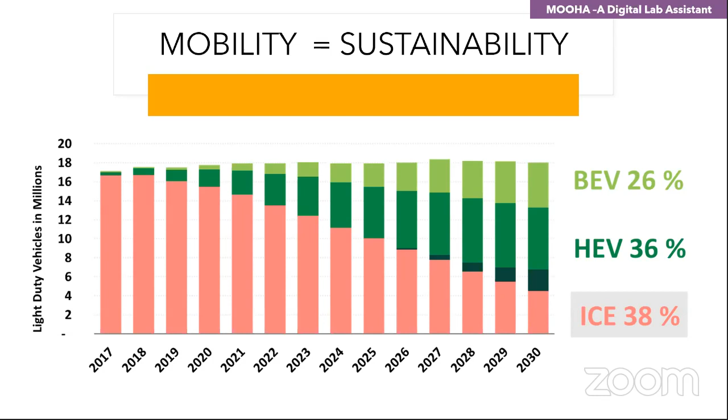ICE is internal combustion engines, HEV is hybrid electric vehicles, BEV is battery electric vehicles. As you see here, by 2030 you will be seeing a significant portion of our road transportation driven by hybrid and battery power. So what this means to the lubricant industry, what this means to the bearing industry, is a big question.

So if you look at the lubricant industry, this is the bar graph, this is a survey done by McKinsey. The volume of lubricants would increase to 2030, and that's basically what we call a threshold. At that point, there is significant adoption of alternatives to the internal combustion engine, and the volume of lubricants used goes down, from 16.9 to 15.9.

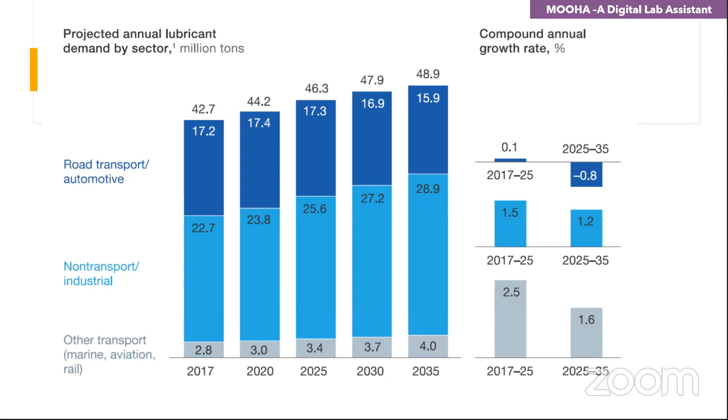The same thing happens, or similar things happen, in the bearing industry as well, where the number of bearings required in the powertrain would go down when you switch from internal combustion engine to electrical vehicle engine. There is a lot of technology and policy aspects to this transformation from transportation to mobility. To discuss these technology and policy aspects in this transition, we have two keynote speakers on this platform. One is Dr.

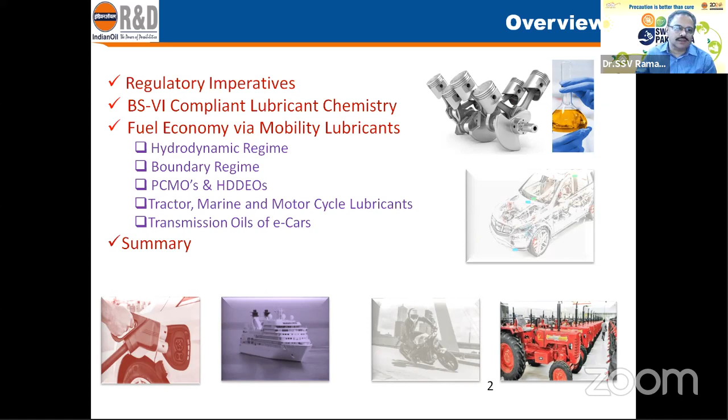Moving on with my presentation, first let us see what kind of regulatory imperatives we are talking about when we discuss the mobility segment. Most of the mobility segment all over the world, not only in India, is governed by three major imperatives: improvement of air quality - most emission legislations ultimately aim at air quality improvement; climate change, due to greenhouse gas emissions; and zero emission travel. When more and more urbanization occurs, mobility becomes more pronounced for urbanized civilizations - by the way, I liked your definition of the difference between transportation and mobility.

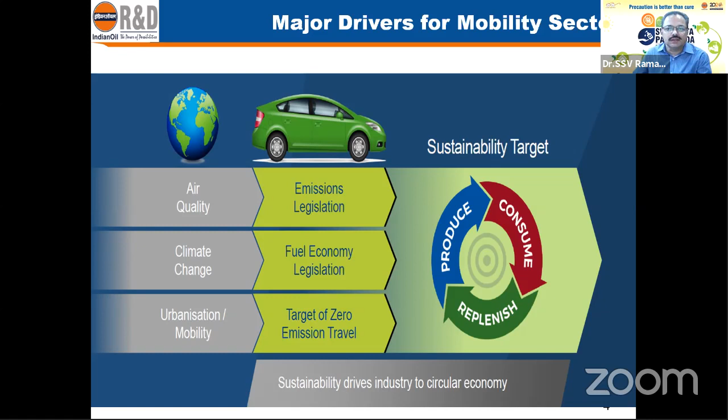Targeting and achieving zero emission travel is one of the key drivers in sustainability operations. That automatically brings the spotlight on fuel economy.

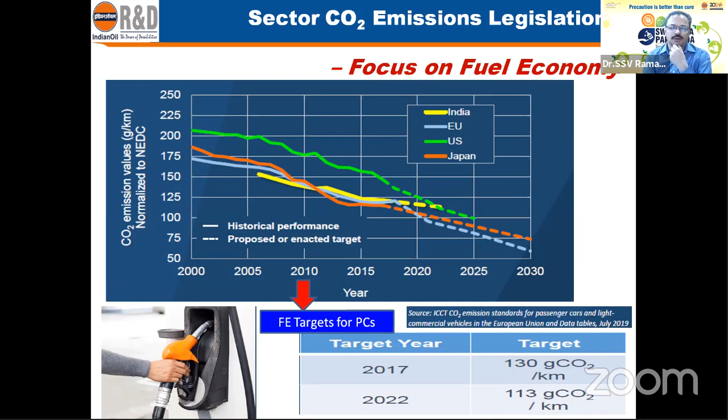And if you see the fuel economy imperatives, each geography has its own set of compliances. I would be sticking to my own geography, Indian geography. In 2017, our target for fuel economy in terms of grams of carbon dioxide per kilometer was 130. But going forward by 2022, we have tightened this target as a nation, and we are set to achieve 113 grams carbon dioxide per kilometer. On the emission regulation front, BS means Bharat Stage 6, which is almost equivalent to Euro 6.

What kind of impacts are we talking about? By the way, we just graduated from Euro 4 kind of emission regulations to Euro 6 kind of emission regulations in Bharat Stage 6.

In April 2020, our fuel quality and emission regulations on a pan-India basis became conforming to Bharat Stage 6 norms. So what does this translate to in terms of key emission ingredients? The toughest ones concerned with climate and ambient air quality are oxides of nitrogen, NOx, and particulate matter.

Let's see how these ingredients and their compliance vary when moving from BS4 to BS6. For example, in two-wheelers, the oxides of nitrogen are reduced by 75% compared to BS4 levels, and particulate matter regulations are introduced for the first time for two-wheelers.

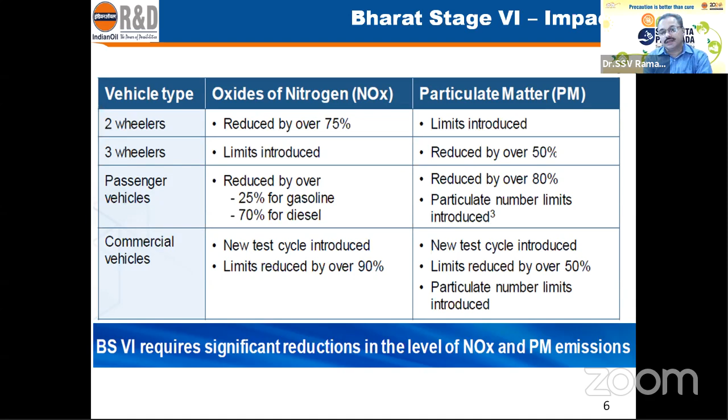Similarly, the automobile industry has pumped in so much money, both industries put together. Now, any new vehicle coming on roads post 1st April 2020 meets Bharat Stage 6 emission norms. So what is beyond?

Globally, people are talking about onboard diagnostics, further tightening of NOx and particulate matter beyond BS6 into 2021, 2022 and 2023. There would be further tightening where second stage onboard diagnostics can be introduced beyond 2024.

In terms of fuel economy legislations, there will be an 8 to 13% fuel economy improvement compared to what exists today. The fuel economy CAFE-like norms were introduced in India in 2017. From whatever we have today, there will be an improvement of 13%.

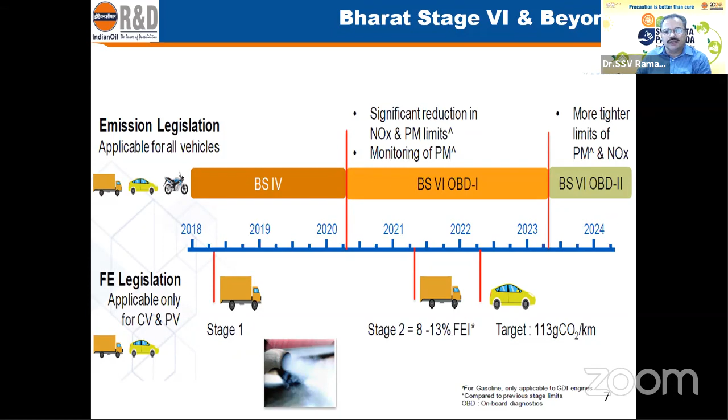As mentioned in the previous slide, carbon dioxide emissions will be reduced from 130 to 113 grams CO2 per kilometer. So there are a lot of technological changes across the vehicular segment, whether two-wheelers, three-wheelers, passenger cars, or heavy duty diesel segments and transmissions—you name it, there's a lot of technological intervention.

A lot of after-treatment devices have come in, whether diesel particulate filter, diesel oxidation catalyst, or selective catalytic reduction—a very prominent after-treatment device especially for the commercial heavy duty segment. Lean NOx traps are also used.

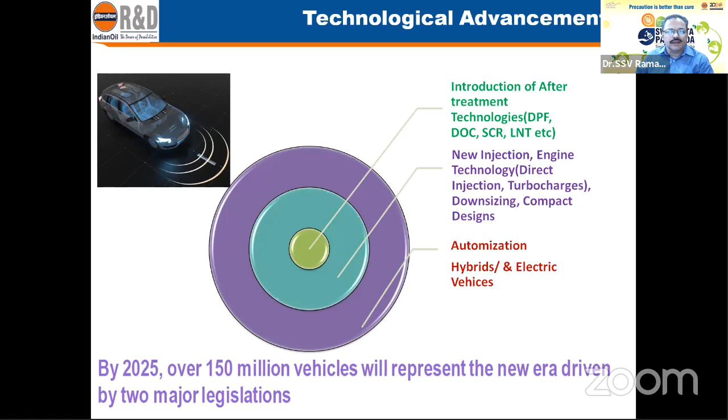These are for passenger cars to meet BS6 compliance. New injection systems, direct injection, turbocharging, downsizing, improved automation, hybrids, electric vehicles—as shown in the introductory slide, there can be several degrees of hybridization happening in the mobility segment. These are all going to pose a lot of challenges for the lubricant to cope with, to be compatible with, and to meet the performance standards laid down by these technological challenges.

So let's talk about the generic change in lubricant chemistry. Whatever the chemistry or type of lubricant, the chemistry has undergone change. Whatever chemistries we have been using, now with after-treatment devices, the compatibility of a lubricant with the after-treatment device is the sole theme of lubricant reformulation as we graduate to the BS6 regime.

And with that came the new concept of low SAPS engine lubricants. SAPS stands for sulfated ash, phosphorus, and sulfur. This diagram shows the deleterious effects that each one—sulfated ash, phosphorus, and sulfur—can cause to various after-treatment devices, and what kind of negative impairment excessive phosphorus can give, and so is the case with sulfur.

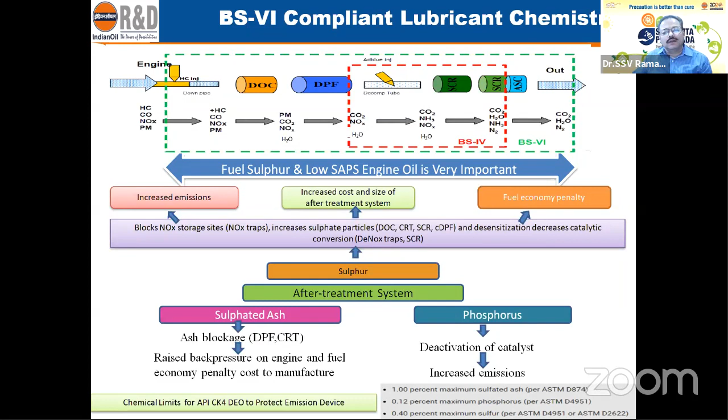So all these parameters have been regulated, and new chemistries have been inducted into the lubricant additive arena, so that these after-treatment devices can function properly, optimally, and to their full efficiency, so that emission reduction is sustainable and durable throughout the life of the vehicle.

Now coming to fuel economy via mobility lubricants, this is the main focus of my talk. For all the clamor about fuel economy, how much fuel economy can we really attempt? If you see...

the energy cycle or combustion cycle of an internal combustion engine, the fuel which is combusted generates energy, but majority of it is lost in exhaust and air. Mechanical losses account for 16%, drivetrain accounts for 10%, and finally the energy that propels the wheels is 12%.

So with the right kind of lubricant, we can aim at minimizing these mechanical losses of 16%, and frictional losses specifically are around 5 to 8%. Our sole focus is on how we can minimize this friction and add to the overall fuel economy equation of the vehicle, whether by engineering intervention or lubricant intervention.

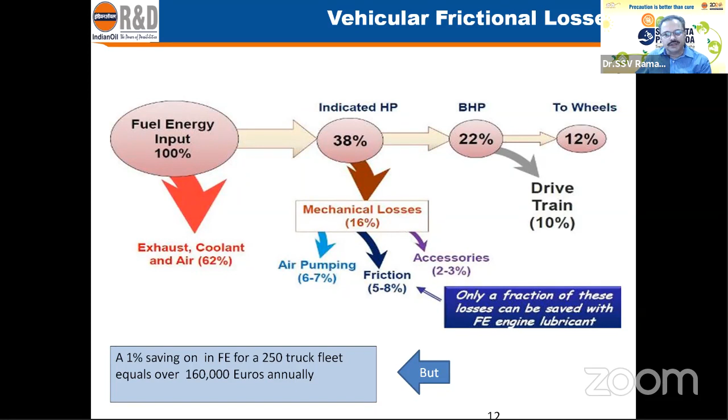But when we talk about these interventions, lubricant intervention is a much cheaper option to garner a significant amount of fuel economy for the vehicle compared to engineering interventions. This graph clearly depicts percentage fuel consumption reduction per investment of US dollar. You see engine friction reduction, cam phasing, cylinder deactivation, gasoline direct injection - these are known engineering interventions to get fuel economy. They are all extremely costly, and the overall benefit they offer is much, much less.

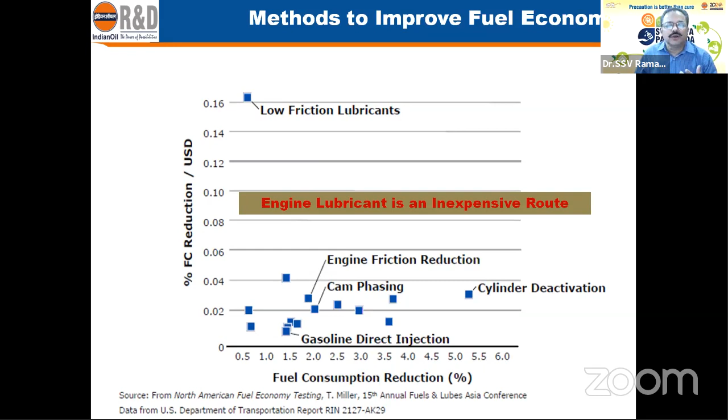But with much cheaper cost, low friction lubricants can offer you substantial fuel economy. So it's all the more imperative for all of us lubrication engineers, chemists and formulators to focus on how we can optimize the lubricant for fuel economy.

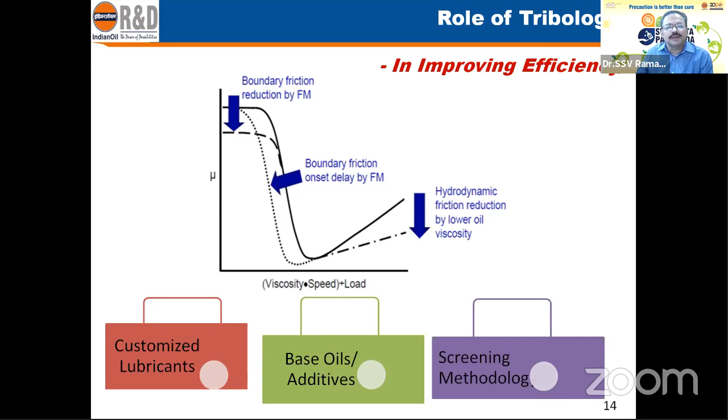So here comes the role of tribology in optimizing a lubricant for improving efficiency - the famous Stribeck curve, with three lubrication regimes: boundary lubrication, mixed or EHD lubrication, and hydrodynamic lubrication. In each of these regimes, lubricant can play a role through customized base oils and additives, with a separate screening methodology acting as an optimization tool for achieving fuel economy in each regime. I would illustrate with examples how tribology plays a key role in optimizing the fuel economy credentials of a given lubricant.

But lubricant also has its own limitations. If you compare the maximum fuel economy impact, driveline lubricants and engine lubricants put together can offer you in all 4% of fuel economy. This was some Cummins pronouncement way back in 2007.

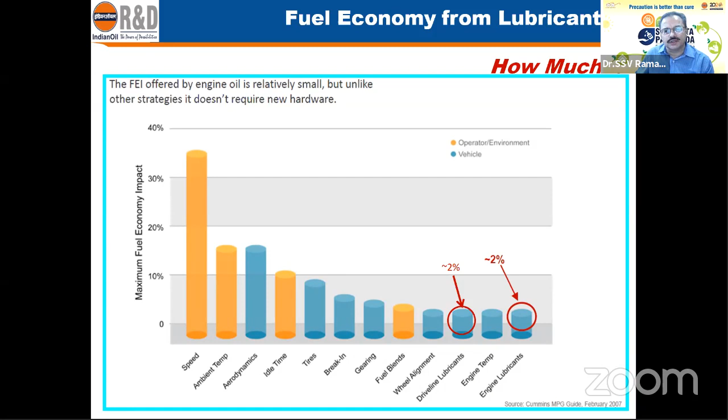At extremely high temperatures, fluids tend to thin down, so maintaining some optimal higher viscosity is needed. At extremely low temperatures, like -20, -30, -40, the monogrades tend to solidify or freeze, so maintaining some lower viscosity is the name of the game, and multigrading offers that. Viscosity index improvers, various kinds of polymeric substances, actually enable the lubricant to achieve this diverging and conflicting behavior - a non-Newtonian characteristic to the fluid.

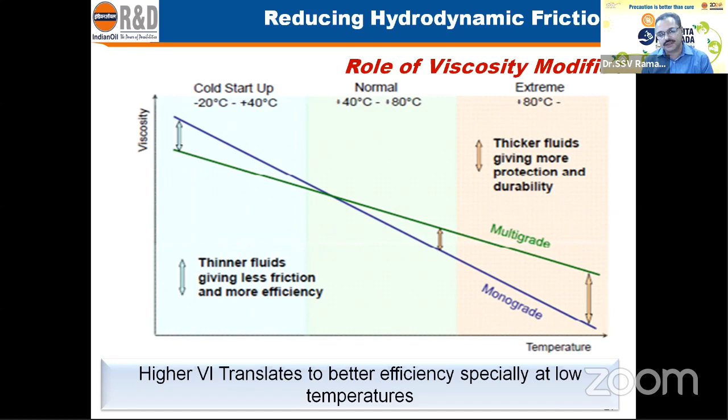Thinner the fluid, it gives less friction and more efficiency. Thicker the fluid, it gives more protection and durability, but fuel economy would be the casualty. So the whole game is how optimally you can balance these two conflicting situations - you need thicker fluids for durability, and thinner fluids for fuel efficiency. So how do we manage this challenge?

Getting some deep dive into the tribology, hydrodynamic friction and the hydrodynamic lubricants for hydrodynamic friction can be very well optimized by tribological instruments like mini traction machines, by following the traction coefficient. It's ball on disc, where you can simulate many sliding conditions that exist in many parts of the engine or transmission.

Clearly, group 3 and PAO4 are distinctly discriminated compared to group 1 and group 2. Group 1 and group 2 are mineral oils with dissimilar composition. They have bigger molecules, smaller molecules, and relatively more disorderliness. That's the reason why the traction coefficient is higher in group 1 and group 2 base oils.

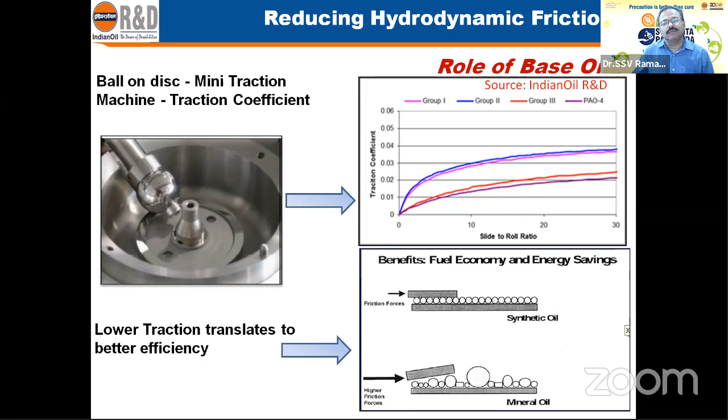So these kind of screenings are extremely important for us to select the right kind of base stock for a given application and for a given type of lubricant formulation. These kind of tribology screenings will come very handy for lubricant formulators who are developing products.

One more time-tested parameter is high temperature, high shear viscosity in predicting and optimizing the fuel economy credentials of a given lubricant, whether it is a passenger car lubricant or a heavy-duty diesel engine lubricant.

You see, this is a graph, a very popular graph from Lubrizol, thanks to Lubrizol. They have plotted the fuel economy versus high temperature, high shear viscosity. When I say high temperature, high shear, the temperature is 150 degrees centigrade. This is an ASTM standard test, and the shear rates are 10 raised to the power 6 per second, or inverse second.

As you go down the viscosity grades, from higher viscosity grades to lower viscosity grades, and as the high temperature, high shear viscosity also goes down, then the fuel economy will go up, from 1% to 4%.

This has been validated by the M111 FE European fuel economy test. This is also a very popular Mercedes-Benz engine test, and that clearly establishes the relation between high temperature, high shear viscosity and the fuel economy.

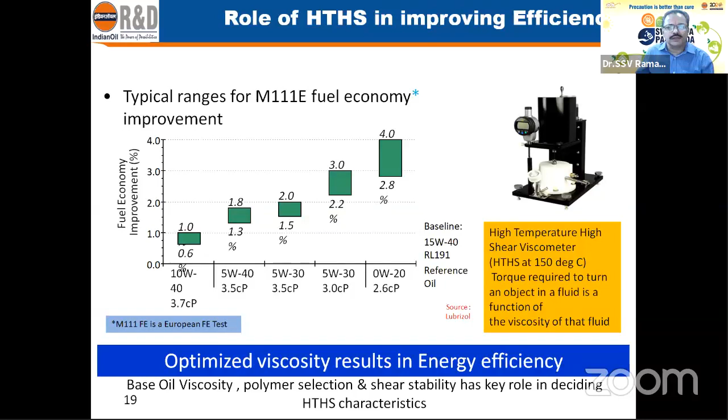In fact, when we talk about low viscosity and higher fuel efficiency, the Japanese are the front runners. We must give credit to them, as they are the ones who actually pushed the famous SAE J300 viscosity classification to introduce lower viscosity grades, which were unthinkable just a decade back. These are interventions only 5 to 6 years old.

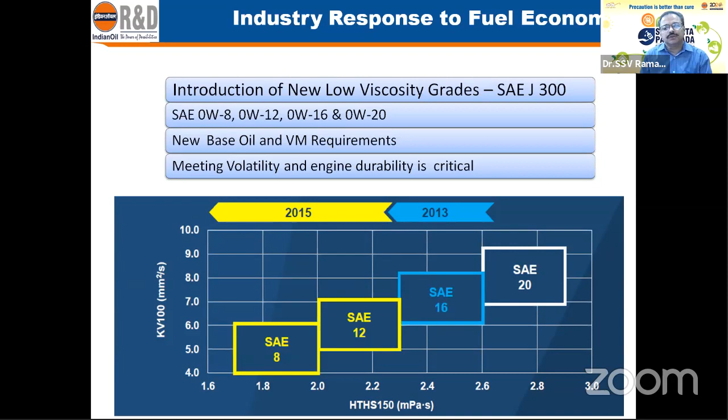These new grades, like SAE 12 and SAE 8, are the new low viscosity grades which can offer maximum fuel efficiency to passenger car lubricants. Slowly, not to that extent, these are popular in the heavy duty diesel segment too, but that segment is also now slowly getting acclimatized and accustomed to reducing the viscosity of their engine lubricants.

Coming now to this - so this is all about the hydrodynamic regime, but when you come to the boundary regime, how can fuel economy be achieved or derived in a boundary regime, when a lubricant moves to a boundary regime?

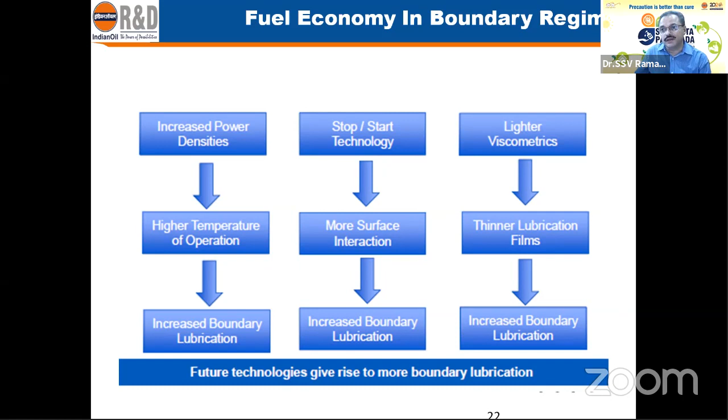Boundary regimes are characterized by high power densities, high temperature operations, and stop and go operations, and very light viscometrics. The lighter viscometrics, because the film thickness becomes very, very small, very thin, means there might be increased boundary lubrication. So here again is a Stribeck curve.

We keep getting this curve. When we are talking about lubrication, we can't do away with this - it has almost become indispensable. So in the boundary lubrication regime, the friction coefficient,

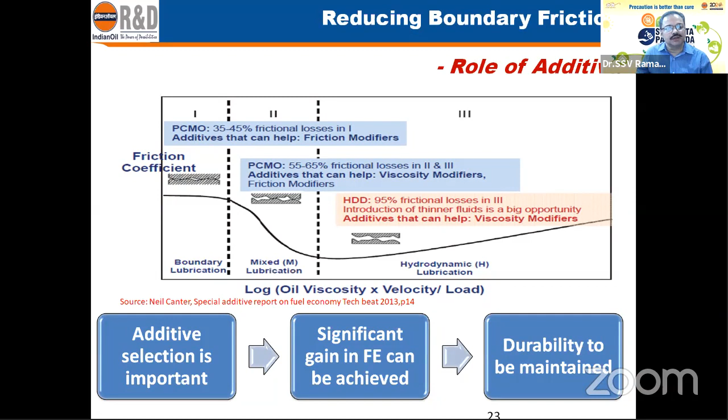additive selection and additive chemistry are becoming very, very important. But as you move to the hydrodynamic regime, as we talked about in the previous section, the viscosity plays a greater role. But the majority of vehicles, majority of lubricants, operate in the intermediary section, the mixed lubrication regime. So here, your viscosity as well as your additive chemistry become equally important.

So I just want to introduce another tribological screening tool, the SRV machine, especially SRV.

SRV is an oscillating test, roller and flat disc, and you can really incorporate any kind of material simulating the actual engine metallurgy. You can operate through various speeds and loads, and you can measure the friction coefficient.

Here is again a very illustrative example of how a friction modifier as an additive can bring about a very distinctive difference in terms of friction coefficient, thereby improving the fuel economy.

See a host of oils that we tested in a particular set of conditions in SRV. The one which is inhibited with the right kind of friction modifier, with right chemistry as well as right concentration or dosage of the friction modifier, see how distinctly the friction coefficient is lesser compared to the rest. This is the kind of distinction that formulators are looking for, and that's how the friction modifiers are selected and incorporated into various formulations.

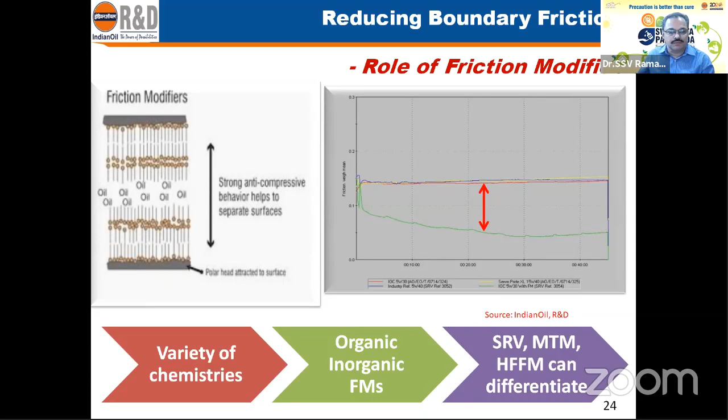That's the boundary regime. Then some more direct examples of passenger car motor oils and heavy duty diesel engine oils which were made fuel efficient. How did we make them fuel efficient? What kind of screening have we done in formulating and launching them in the market?

I'll first talk about passenger car motor oil fuel economy. We have again taken resort to MTM traction coefficient studies. Also, we have a friction torque test which is conducted on an actual engine.

Both these tribological screenings can be validated by the actual fuel economy measurement in a vehicle on a chassis dynamometer. We invariably use in India the modified Indian driving cycle, because that is more akin to our driving conditions than world harmonized testing cycles or any other cycles.

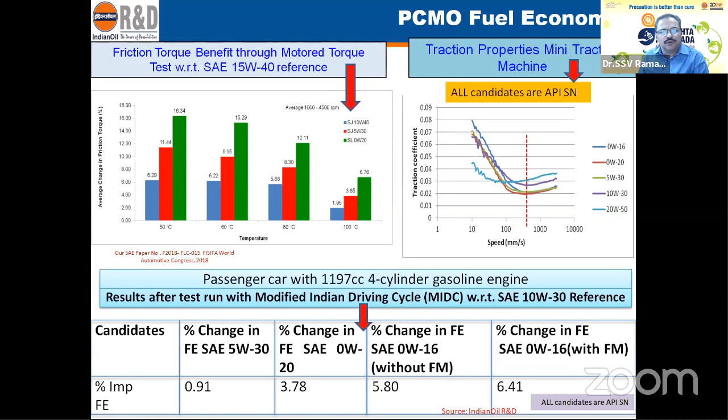So the good oils from the screening of this friction torque test as well as the MTM screening of traction coefficients are all validated by chassis dynamometer testing, wherein as you go down the viscosity, viscometric scale, the fuel economy has been actually improved, and you can get as high as 6.41% in the set of conditions that we have tested in a gasoline engine, in a four cylinder gasoline passenger car.

Coming to the heavy duty diesel engine, till very recently, I think till 2010, fuel economy via diesel engine lubricants was not a very accepted concept. The idea was that only passenger car engine lubricants can give fuel economy, that diesel engines are otherwise very fuel efficient, and a lubricant cannot make much of a difference on account of fuel efficiency in a diesel engine. This used to be the concept, but

we have proved wrong. Many people in the world and many lubricant formulators have proved that wrong. Also, there was an anathema in the heavy duty diesel segment to go down the viscosity line from 15W40. SAE 15W40 was gospel viscometrics, and going below it would be almost perceived as detrimental for the durability of the engine.

So we attempted, for the first time at least in our country, to go for 10W30s. Today, of course, 10W30 is a very popular grade in heavy duty diesel engine lubricants also. But when we did it in 2010, we had to face a lot of resistance from engine manufacturers and the users as well. So the sole apprehension was that when you reduce the viscosity from 15W40 to 10W30, the durability would be at stake.

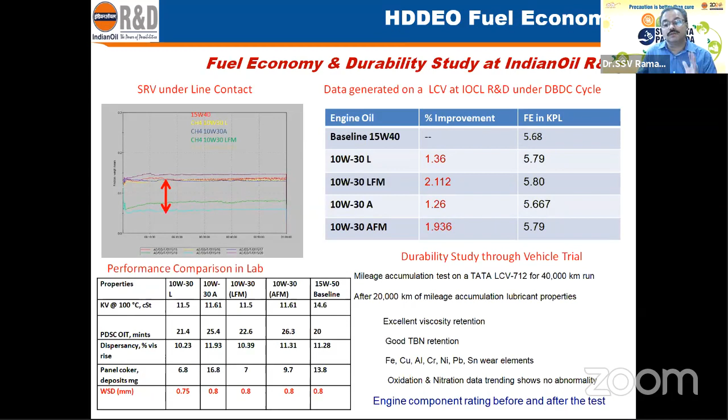And we could validate this not only in chassis dynamometer but also in actual field trials. That's how the concept of a green combination, a fuel economy combination of engine oil, transmission oil, and axle oil, has come to the fore.

Our company in India was one of the first to introduce this green combo of three fuel efficient lubricants. Our claim was that if you change this set of three lubricants in a heavy duty diesel engine truck, you can garner a fuel efficiency as high as 4%. And we have proven it and validated it in the actual field.

So what all we did is, we have reduced the viscometrics in the engine oil case from 15W40 to 10W30. In axle oil, the traditional viscometrics is 85W140, and from there we have reduced it to 80W110. And in transmission oil, the conventional 80W90 was replaced by a lower viscometrics 75W80.

While doing so, we were very conscious about the few percentage points of fuel economy that we might get extra. We were extremely conscious about durability, and we have augmented the anti-wear chemistry of the lubricant formulations of all these categories of lubricants.

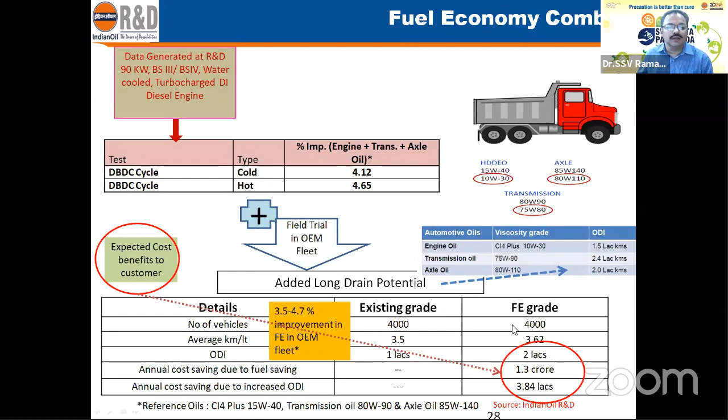So what kind of monetary advantage? These numbers look very small when you talk about fuel economy, but on an annual basis, the fuel saving benefits run into millions of rupees. Even the drain periods can be introduced or extended, and there also you can realize benefits.

So tractor lubrication is another segment. In fact, India is the largest producer of tractors. In tractor lubricants, besides engine and axle, there is a wet brake lubricant, which is a key lubricant employed in many oil immersed brake system containing tractors. And chatter is a big, perennial problem in these tractors.

A lot of theories are there - static friction, dynamic friction. You optimize one, the other will go off, and there appears a chatter. Chatter is a big irritant for the user, so they hold the lubricant solely responsible for the chatter. So the best and optimal condition is you should have low static friction, and at the same time, at the right kind of time, you should have high dynamic friction so that the chatter would not be there.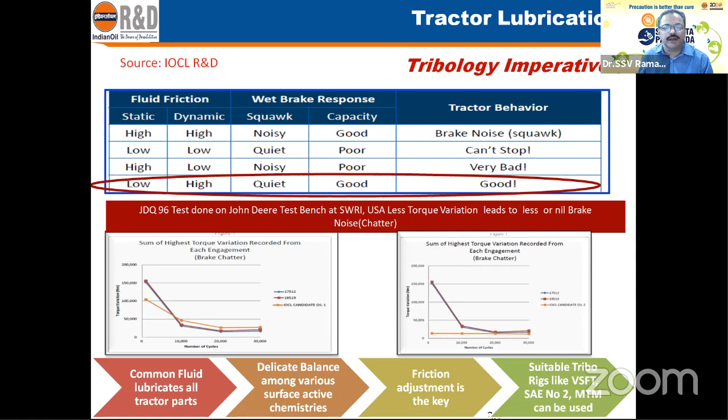And we were able to screen properly in a John Deere screening test at SWRI, and we could get an absolutely noiseless lubricant.

I would only take one more example - this is an example close to my heart. Marine lubricant formulation is a different ball game. Unlike the case of passenger car motors and heavy duty diesel segment, where there are standard engine tests where you can optimize the lubricant formulation before it is put in the actual engine or in the field, for a marine lubricant there is no standard engine test, no universal specification, unlike the case of PCMOs and HDDOs.

So you have to totally rely on your gut feeling, or you have to rely on tribology. So we relied on tribology, and we have a high frequency friction machine, which is actually a reciprocating machine, where film thickness is measured when contact potential is observed, and you see a good oil and a bad oil. The lubricant film between piston and cylinder liner, especially in huge marine two-stroke engines, cylinder liner wear is the key performance attribute expected out of marine lubricant. And to optimize that, there is no other engine test, no other means.

So we devised this tribological screening, and see this - in a bad oil, you see these valleys in the graph, which clearly indicates that the film is forming between piston and liner, but it is getting broken. Such an uneven film will lead to catastrophic cylinder liner wear.

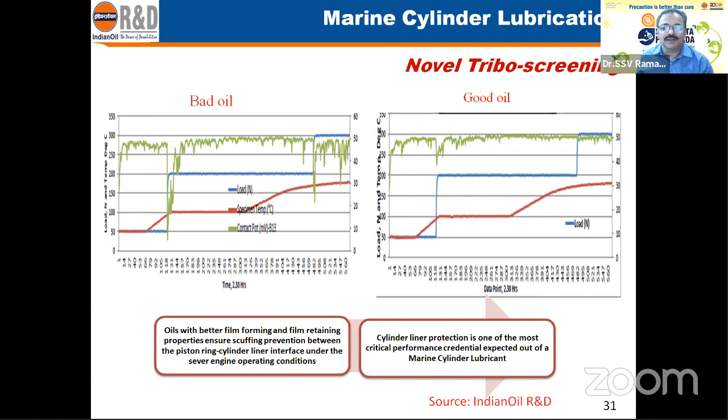We were able to very accurately predict this by tribo screening. Believe me, based on this, I have run two marine shipboard trials, paying huge money in terms of insurance premium. Ultimately, we could get the approvals of the original equipment manufacturers. That is the beauty of this tribo screening.

So I'll skip the motorcycles, and I would only move to this, my penultimate slide.

So much of talk about e-mobility and e-cars, and transmission oils. Ordinary transmission oils need to be reformulated, and noise performance is to be taken into consideration for the transmission oils which go into these electric cars. And it's a big challenge.

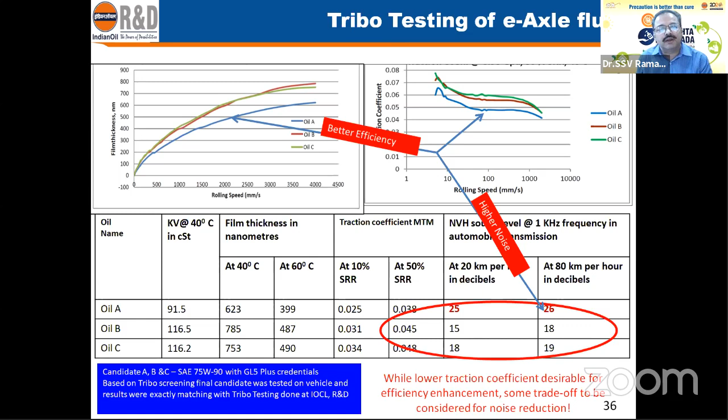Like you see the film thickness of this blue line, this is oil A, and the film thickness is lower, so viscous drag is lower, and so the traction coefficient is also lower. But I thought, I'm rejoiced, okay, the traction coefficient is less, so this should be very good. But see the noise readings - this is one of the worst oils as far as noise is concerned.

So there should be a trade-off between the noise performance and efficiency and film thickness. So I think it's a great challenge, and tribology again can come handy in negotiating those tough challenges.

So to conclude, tribology plays a key role in developing customized lubricants. Friction reduction is the key for improving efficiency. Low viscosity oils need to be balanced for better wear protection and durability besides fuel efficiency. Tractor, marine, and motorcycle lubricants need to be optimized using sound tribology fundamentals. Transmission oils for electric cars also require noise-related tribology screening.

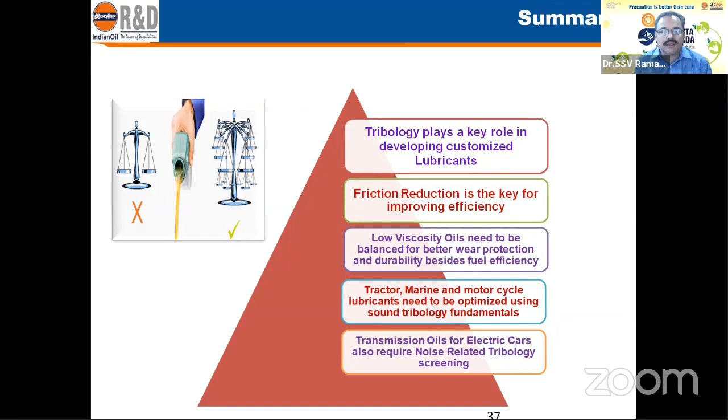Thank you, Dr. Ramakumar. Fascinating description of various elements involved in transportation. And it was very nice, the last slide, where you described the noise and vibration effect and the challenges in it. That becomes basically a preface.

It's a preface for Sergio to take it up from here, I guess. Noise, vibration, and harshness have become the driving factors for bearings in electric vehicles. So the platform is yours, Sergio. Please go ahead.

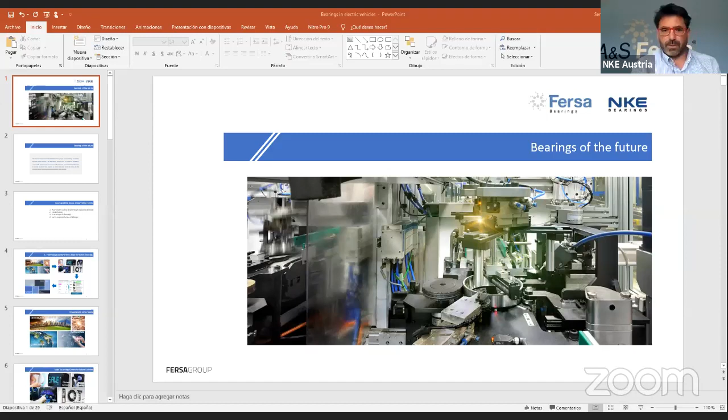Okay, so can you see all the screen? It's perfect, Sergio. If you can make it full screen, then it's just now. Yes, perfect. Go ahead, come in.

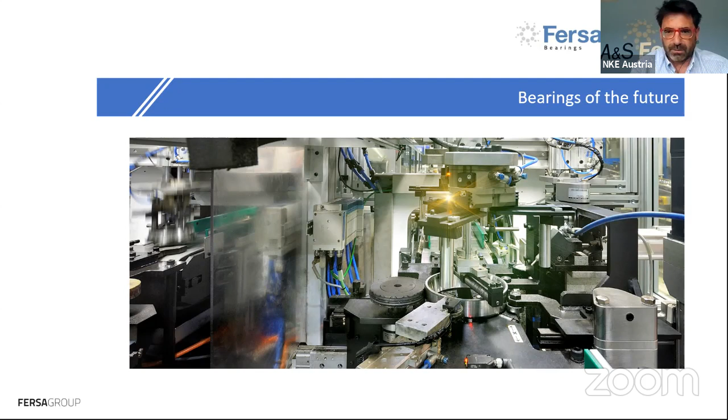Basically, I want to tackle 4 main chapters or topics. First one is how society shapes tomorrow's components or tomorrow's bearings. Some of my insights were also discussed before by Dr. Deepak and Dr. Ramakumar. What that means for electrification - I will try to provide some pictures of the different electrical vehicles or electrical models, either hybrid or battery, and so on.

Third is when we see the future versus electrification, it seems that the future is really black. But I think there's a new hope for bearings. I will dive into this topic and provide some insights that bearing makers - not only us but also other bearing makers - are looking at as a kind of challenge for us. And finally, what is the response of the company we are representing today to these new challenges?

This is a summary of how society drivers shape tomorrow - not only bearings, but also mechanical components, but let's talk about bearings. Some of them were already mentioned before. So as society, we have some social trends you see here on the top left corner. Those trends move to address some technological drivers. If we move to electrical mobility that you mentioned, Deepak, mobility has a very nice definition with flexibility and sustainability. So we have some challenges on electrical mobility, and those challenges also going down when it comes to bearings put in front of us some other challenges.

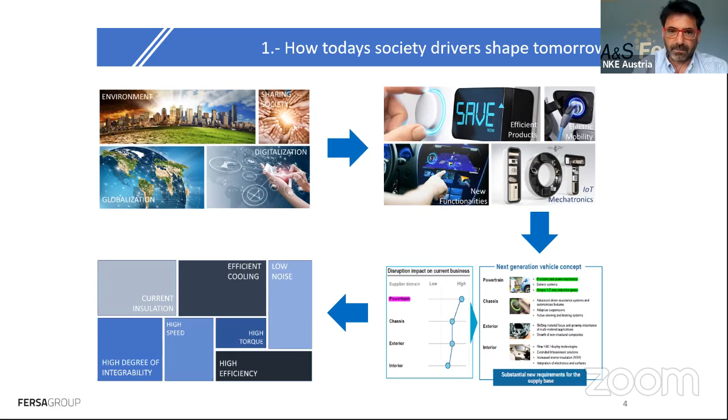I will try to explain. So, going into some details, this is a partial view of the predominant social trends. There are some others you mentioned before, but in general, we are all concerned about the environment. We are living in a sharing society, sharing cars or other services. We are for sure in the digitalization era, and this is all on a global basis. So that could be some of the top 4 social trends.

But basically, those social trends lead to some technology drivers. I'll summarize, according to my opinion, the main technology drivers for all components, not only for automotive but for any kind of industrial field. So we are talking about more efficient products.

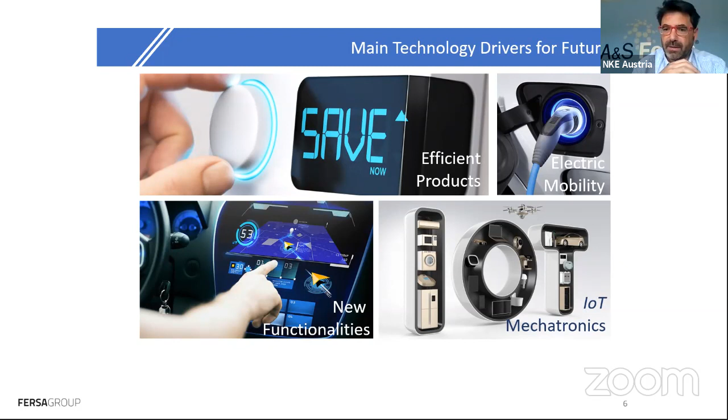That's also what Mr. Ramakumar addressed before. We are talking, of course, about electrical mobility. We are talking about new functionalities for the components, for systems, for the services we have to provide to society, and we are also talking about IoT, Internet of Things, or mechatronics in general. So mechanical components that were purely mechanical in the past are now also including some electrical or electronic features. We are living in a hybrid model, a mixed model of mechanics and electronics.

Moving one step forward into electrical mobility, we are facing some really big challenges, because the next generation vehicle is going to put on us and on the different manufacturers and players new challenges in the powertrain, chassis, exterior and interior of vehicles. The expected impact on the powertrain due to electrical mobility is the highest versus the other three sectors. So at the end, the components involved in the powertrain, and eventually the bearings, are going to be impacted somehow by this movement to electrical mobility. That is for sure something that is going to be there for the next years.

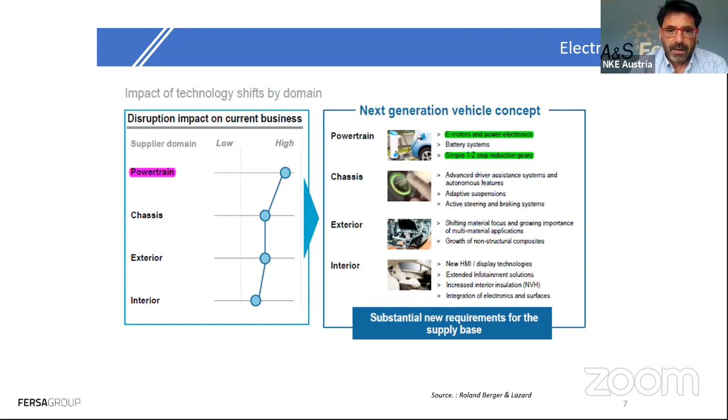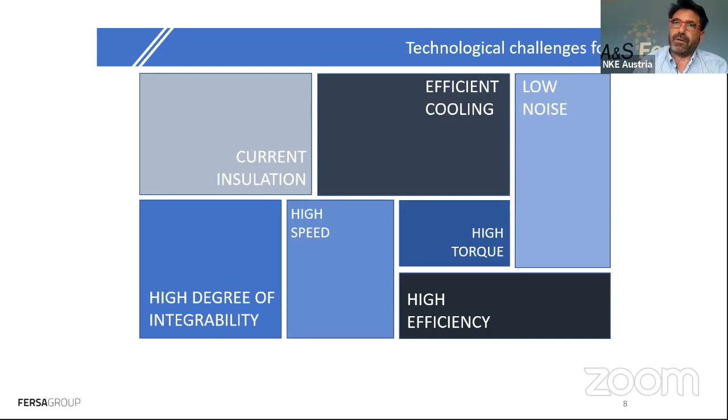Finally, some of the challenges we see as bearing manufacturers when it comes to bearings. Dr. Ramakumar also pointed out some drivers in terms of lubricant efficiency, noise, vibration, friction behavior, and durability. If we talk about bearings, those are the main drivers, the main challenges we need to address in the next years.

We need to talk about insulation, current insulation. We have to talk about cooling, because of the heat created by the batteries. We are going to talk about noise, torque, efficiency, speed, and also integrability into the new architecture of vehicles.

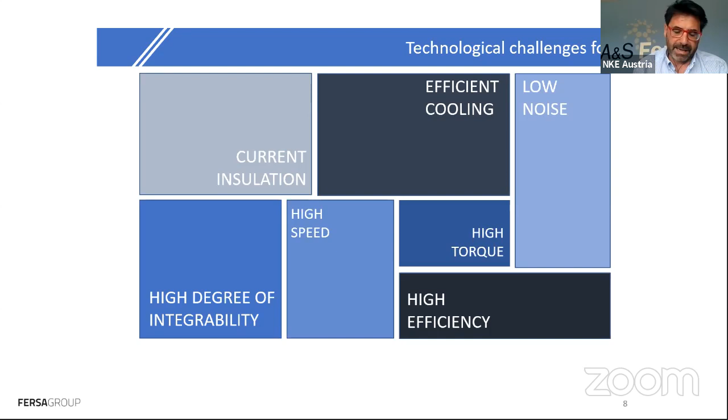Before going into detail on the potential answers to those challenges, let's talk about electrification. Let's put some figures on the topic. There are a lot of analyses. You also put one, Deepak, in your presentation concerning the expected evolution of battery electrical vehicles in the future.

I just took this graph from a white paper, and you can see from different sources - UBS, Bosch, Schaeffler, Faurecia, Continental - what the expected trends are in terms of electrical vehicle penetration. So all in all, let's say that for an average by 2025, we are expecting like 10% penetration, and for 2040, we might expect between 25-30%. Just take these as rough numbers, but they could be used as a kind of baseline for further discussions.

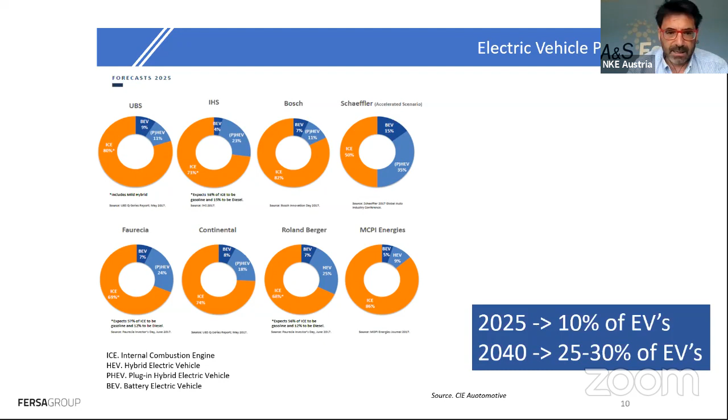Apart from this penetration, we are going to see different penetration depending on the regions, and depending also on the kind of transport. My main topic, our main business, relates to heavy vehicles, heavy duty vehicles - basically trucks, trailers, and buses. That's why I put this in my presentation.

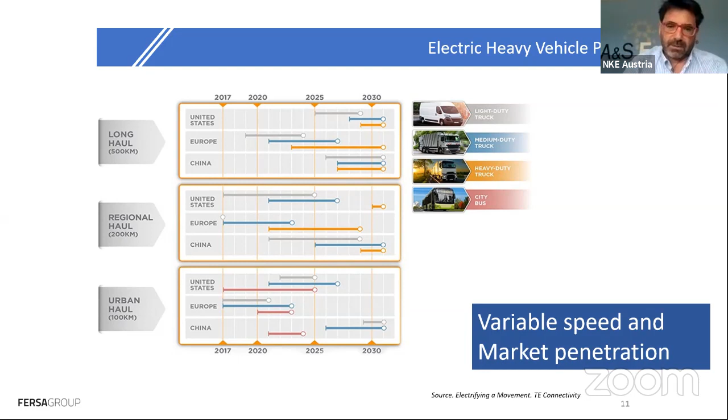You can see there is a variable speed of penetration, and different market share depending on the regions and on the distance the trucks have to cover. We see very different approaches depending on the regions, like China moving on buses very fast, with the US being more reluctant to adopt heavy trucks based on electrical power. Europe, probably due to the regulation also explained by Dr. Ramakumar, is more prone or eager to implement this technology. But in general, we see different speeds depending on the geographical area.

Also, if we talk about architecture, some of this was mentioned before, but what does it mean, electrical vehicle? It's not just one type of vehicle.

At the end, we'll have like 3 or 4 different vehicle architectures living together, sharing the roads.

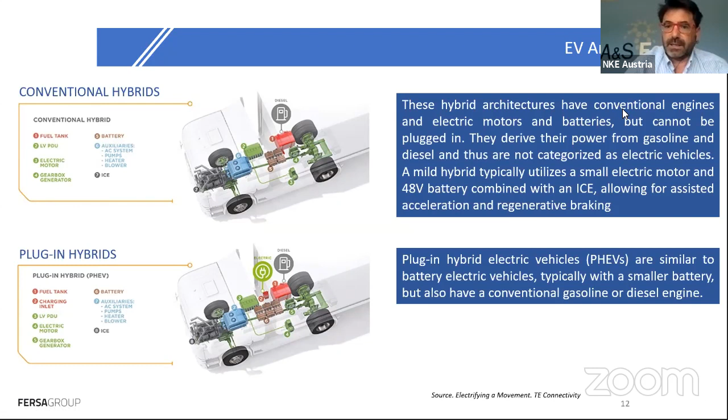We have, of course, conventional hybrids, which are basically a combination of diesel or gasoline internal combustion engines plus some electrical motors and batteries that can provide extra power to the internal combustion engine, but they cannot be plugged into the network. Then we have plug-in hybrids, which are electrical vehicles with a smaller battery that can be plugged into the network, while also having a conventional gasoline or diesel engine.

And we also have pure electrical vehicles, called battery electric vehicles, that use stored energy in the battery to drive the electrical motor. In this case, we have issues related to voltage that will have effects and consequences also on the mechanical components, as we will see later on.

And then finally we have hydrogen fuel cell electric vehicles, where the battery is replaced by a kind of fuel cell that generates electricity from hydrogen. So we have those 4 architectures at the same time on the roads, and all of them probably have different requirements in terms of components or bearings.

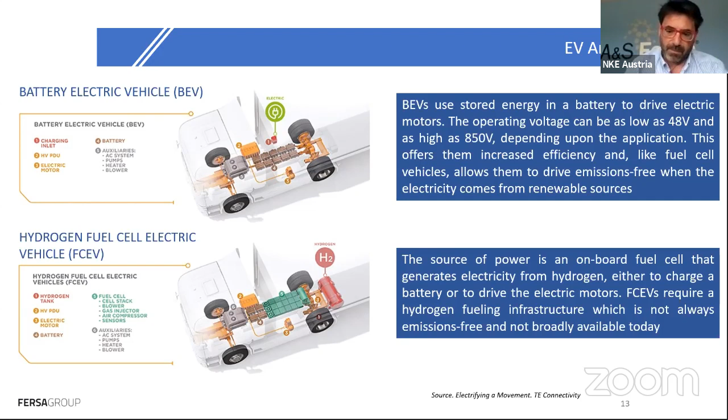So what does that bring to the table in terms of bearings? Because we're talking about different speeds and market penetration, we're talking about different architectures. When it comes to the components, when it comes to bearings, what is going to happen?

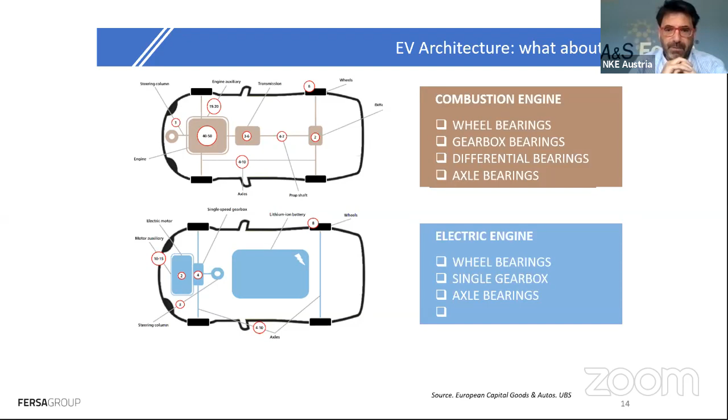Well, clearly it's a reduction. What we see is a reduction of bearings in general in vehicles, in cars or in trucks. Now we have wheel bearings, gearbox bearings, bearings in the differential, bearings in the axle. In the electrical vehicle, we basically have wheel bearings, maybe some axle bearings, and a very simplified gearbox.

So if we put those trends or expectations into numbers, for an internal combustion engine we might have between 80 and 100 bearings, that's a rough number. In a battery electric vehicle, we have between 25 and 40, just to simplify. So we'll have between 50 and 75% fewer bearings in an electrical vehicle compared with an internal combustion engine.

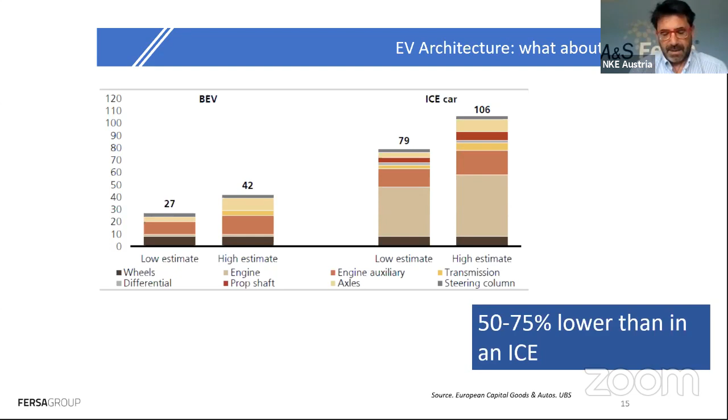So then, what to do? What room does this situation leave for bearing makers? But still, I think there is new hope also for the bearing makers and the bearing industry, fortunately, at least in the automotive sector. This is based on some insights that I'm putting together and collecting also from other colleagues in the industry, but they provide us at least some futures for bearings.

So we still need to develop and invest a lot in research and development to feed the market with solutions coming from the challenges posed by electrical vehicles. Some of those challenges are dealing with less space, so we have to minimize the requirements in space while the power stays the same or even higher. So we need more compact power train designs, trying to reach weight reduction, and also work on decreasing operating temperatures, ultimately enhancing the overall power train efficiency of the bearings.

Dr. Ramakumar noted in his presentation the savings for a 250 truck fleet, around 200,000 euros with just 1% of fuel efficiency. So bearings can also play a role in this challenge, and then we're talking about fuel efficient bearings or fuel efficient solutions.

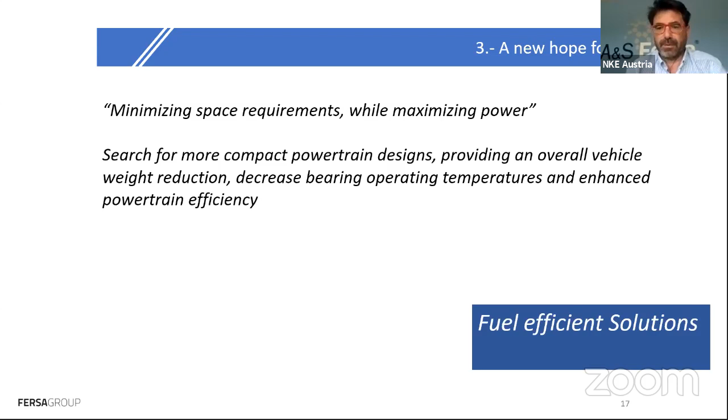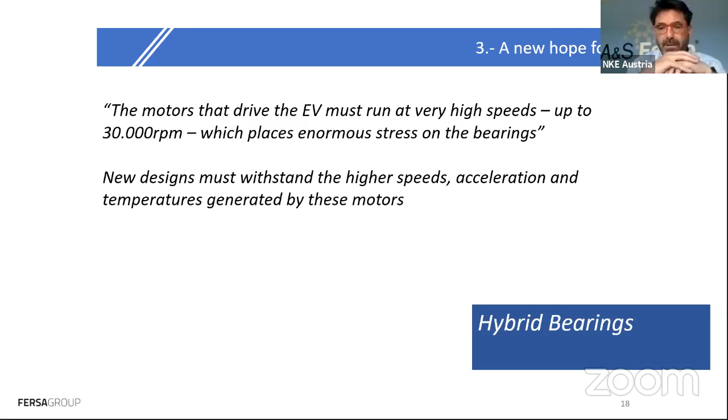Another insight on electrical vehicles is that we have motors running at very high speeds, like 30,000 RPMs, which ends up leading to a huge strain on the bearings. So we have to consider that new bearing designs must withstand these high speeds and the acceleration and temperatures generated by those motors. So at the end, we're talking about some kind of hybrid bearings as a solution for this challenge.

What else? We have electrical motors with current flowing, not instead of diesel or gasoline but besides diesel and gasoline, we have current, we have electrons running on the system, flowing through the system. So we have to take into account the effect of high frequency voltage running on the system, working on the inverter, and this current could also lead to some leakage that can cause pitting on the surface of current steel bearings. So then we need solutions to avoid such failures, and we're talking about insulated bearings or hybrid bearings.

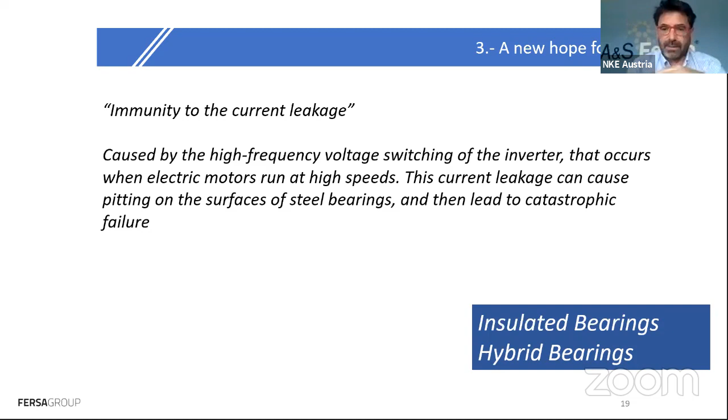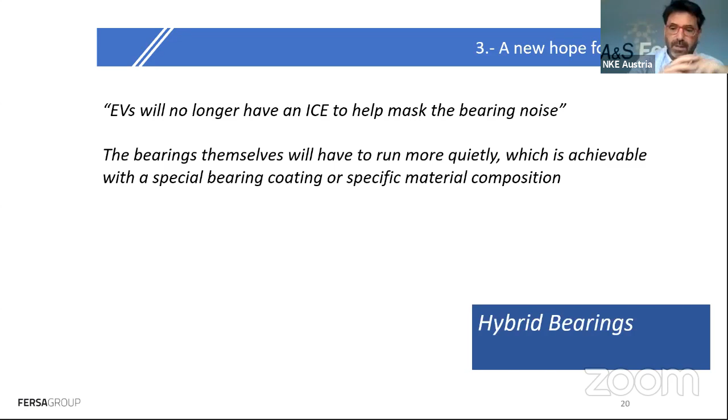Also, the topic of noise is considered in different ways. Electrical vehicles will not be able to mask the bearing noise. So up to now, bearing noise could be a sign of early failure or a potential failure in the future. But in some cases, there's nothing related to failure, but something not well assembled or well lubricated, and then we feel a noise. In the electrical vehicle, there is mostly no noise, so we'll need bearings that run more quietly and more softly, and we'll need either coatings or hybrid bearings to cope with this challenge.

What else? We also need surface coatings. The tribology is basically here. We need to enhance the properties of the surface, or the tribology properties of the bearings, and we need to count on new surface coatings and new oil and grease lubrications to deal with this topic of performance enhancement.

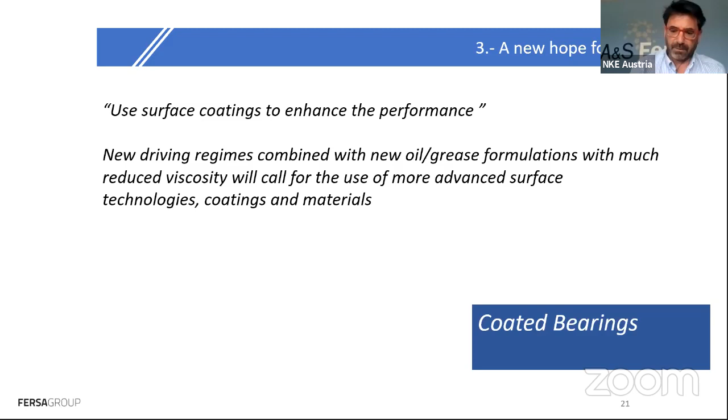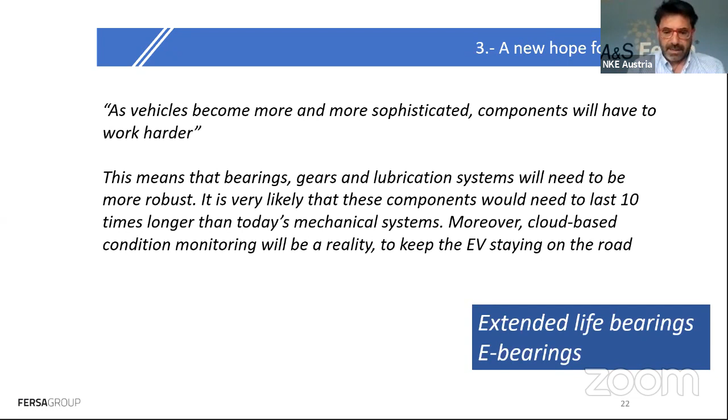Another insight is that we expect bearings, and components in general of the vehicle, will have to work harder over time, because vehicles will become more sophisticated, with more electronics and more services and functions. That will have an impact on the bearings, so we need to work on more robust bearings. That means we need to provide to the market, to end users, kind of extended life bearings, or even e-bearings, taking into account connection to the rest of the components of the vehicle, and tracking condition monitoring of the bearings during running to keep vehicles on the road rather than in a repair shop.

And last but not least, we have to consider the effect of electrical vehicles on the lubricant, because lubricants and bearings are a couple that cannot be dissociated from each other. At the end we have batteries instead of an internal combustion engine, and the batteries are a generator of heat. So we have to deal with this heat increase, manage how to cool and improve this transfer capability, and keep the whole system under a good temperature condition.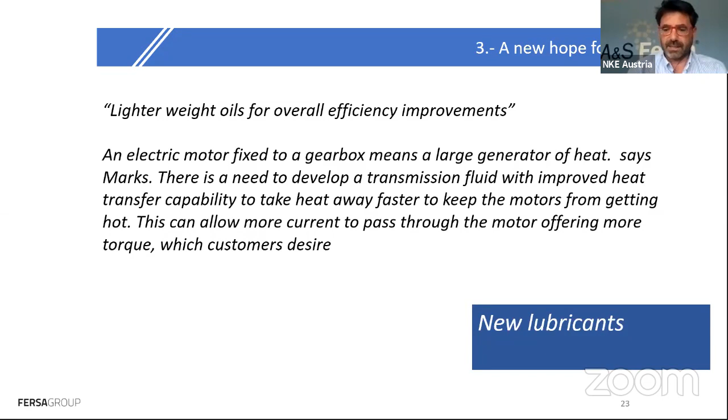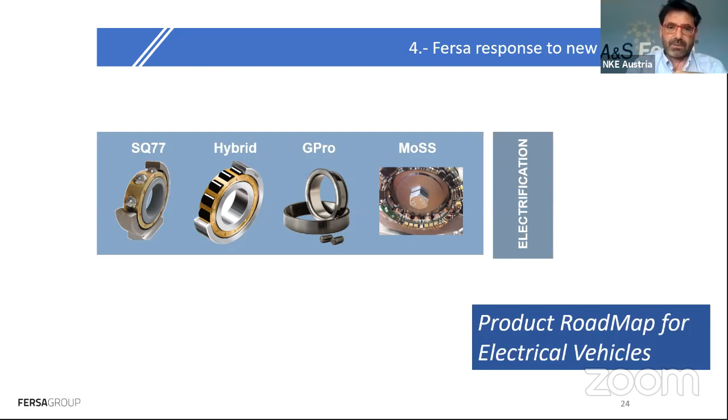With all these insights, most bearing makers, and in particular Fersa, the company I'm representing today, are working on some of those solutions. We have what we call our product roadmap for electrification, where we've identified certain products to deal with the challenges I mentioned before.

We are working on some kind of electrical insulated bearings to deal with current leakage and current running around the system, with some features I will not explain in detail.

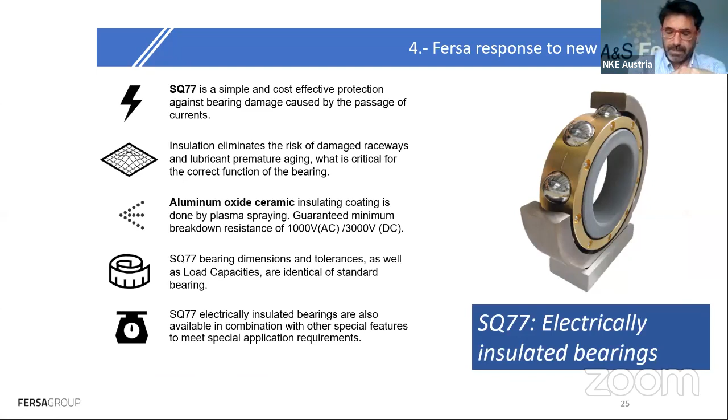We also have ceramic bearings, a sound combination of steel material on the rings plus ceramic material, silicon nitride, basically on the roller elements, either balls or rollers. This can provide very nice performance in terms of noise, weight, and of course electrical insulation.

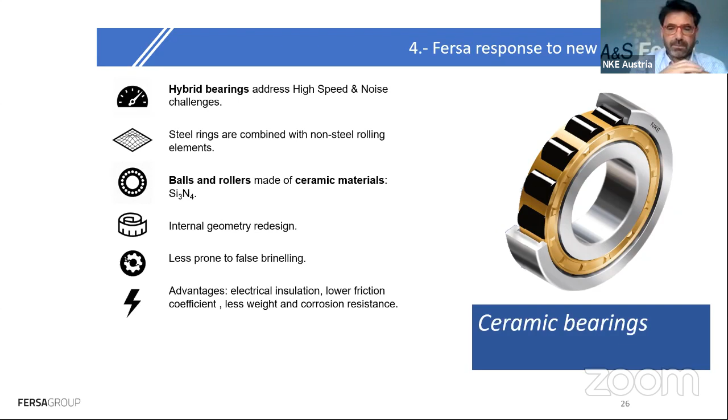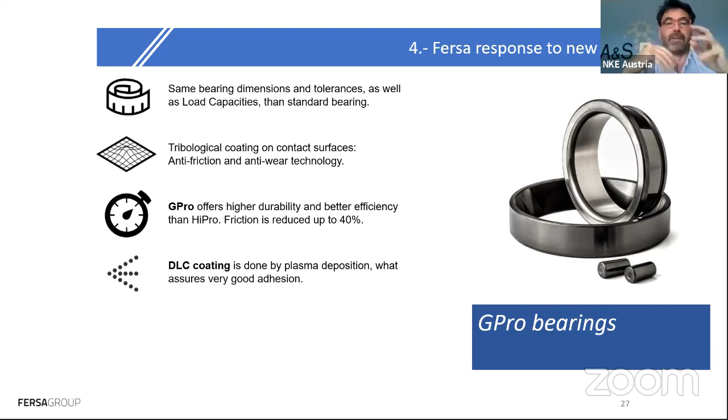We also have some coated bearings based on DLC coatings, to deal with friction topics, high speed topics, and durability topics.

And we also have what we call our connected bearings, or e-bearings. This is called MOSS, modular sensor system bearings, intended to measure some of the variables around the bearings and provide those measurements by Bluetooth communication protocol to the central unit or to the user's mobile, then inform or report about the situation, the status of the whole system.

So at the end, you see that we have really strong, high challenges in front of us in terms of society and electrical mobility. Those trends are going to put the components of the powertrain under pressure, and in particular the bearings. The number of bearings in vehicles in the future will be lower than currently, but there is still some technical challenge that we need to address, so there is room for improvement.

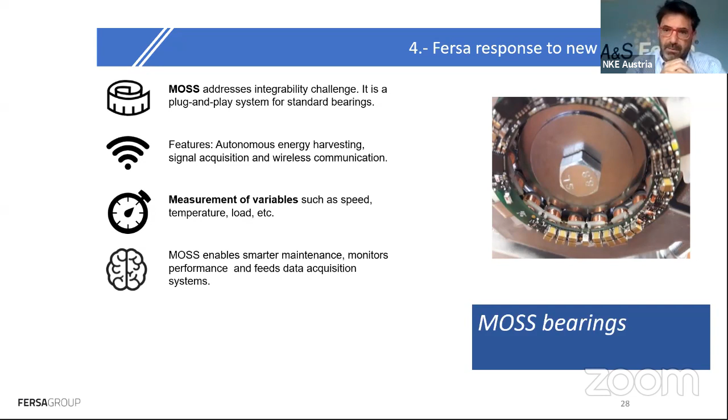There is room for bearing makers to keep working on bearings, to research new ways to deal with the challenges that electrical vehicles are putting in front of us. That's all, thanks. You have my data there.

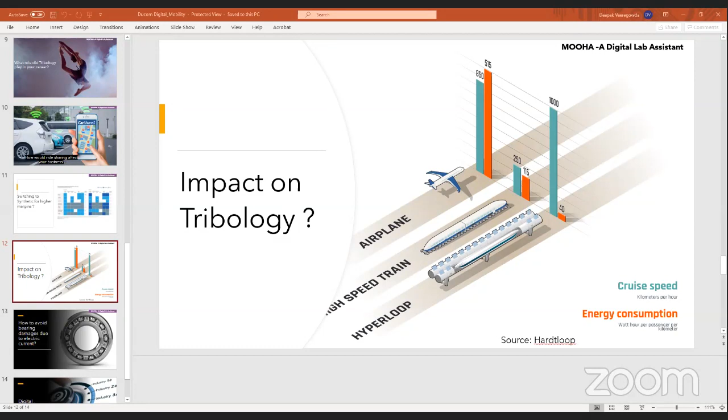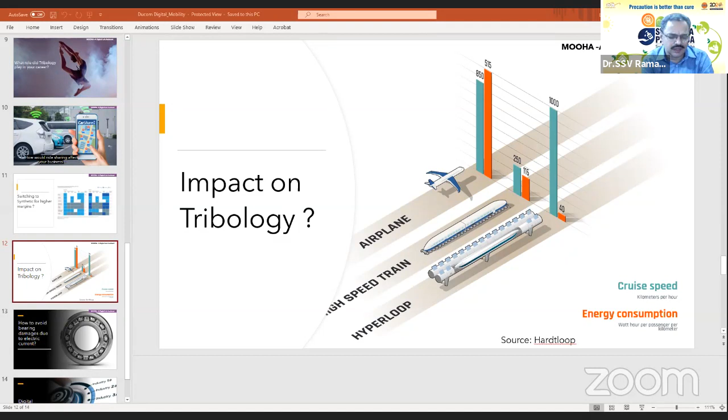Dr. Ramakumar, do you have any experience in testing oils at high speed, 20,000, 30,000 RPM? We used to read, especially some multinational counterparts like Shell and Total, they used to talk about bearing oil film thickness, which can be measured by some tribometers. BOFT is a good concept to predict the performance of a lubricant in high-speed bearings, mostly gasoline engine or passenger car segment.

It used to be there, but precisely, can we really measure or not? My knowledge is more towards lubricant testing. So in such high-speed rotational bearings, what kind of film thickness that lubricant maintains and how it's going to impact the performance of the bearing - I think that kind of screening can be done, it's already there. Some test methods are there, not standard definitely, but they are there. Some papers are published on that aspect, if that student is asking about that.

Right. This takes me to another interesting question. We talked about flexibility, which is a driver for mobility, gives us freedom. And what I understood is that ride sharing, car sharing, or carpooling has an effect on the lubricants business as well as could be in the bearings industry.

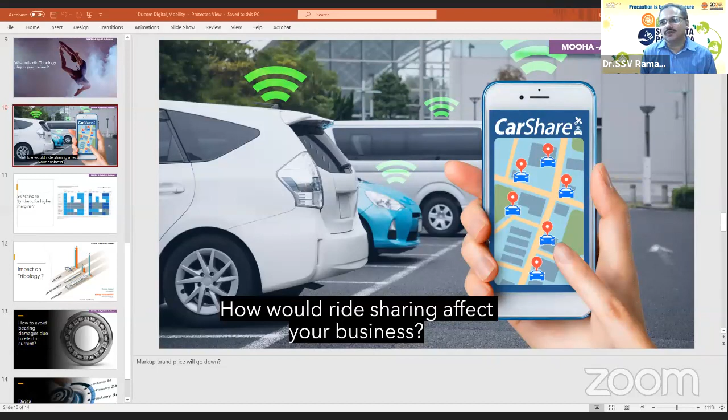So first of all, post-COVID, or during COVID also, the first concept disruption is that shared mobility is one concept which was gaining currency pre-COVID, just three months back. This is the one which is disrupted, and people are saying that now that concept is a big no-no for every one of us. Every prediction from automobile industry to oil industry says gasoline sales are going up. The automobile industry is saying today there's a big news item in Indian newspapers that second-hand, pre-owned car sales are rising like anything. So everybody prefers personalized mobility, and ride sharing as a concept, I think COVID has pushed it backwards.

Having said that, if suppose till three months back, yes, this is the new trend every one of us were working on. I feel as a lubricant marketer, I see it as an opportunity, because selling the right kind of lubricant to an individual customer, the usage of right oil for right application, RORA, was a distant dream when you're selling to individual consumers. But selling to a fleet owner, you can still educate that fleet owner to use the right oil for right application. So at least the quality of lubrication can be improved, and quality commands premium. The businessman in me says this.

True. So Sergio, do you think this will have an effect on your business in the bearing industry? I mean, first, everything related to service is now - we are scared about that. So no more service due to the pandemic in the next months probably. So that will affect the service business in general.

In terms of business, one of our main customers are already fleet owners. For trucks, they are serving fleet owners, and trucks are shared between different drivers and different regions. So I don't see any special effect, because they are buying in bulk the components of the bearings, or buying depending on a single distributor. So I don't see any additional impact, because we are already working on this kind of sharing vehicles - the truck industry is used to working on that concept.

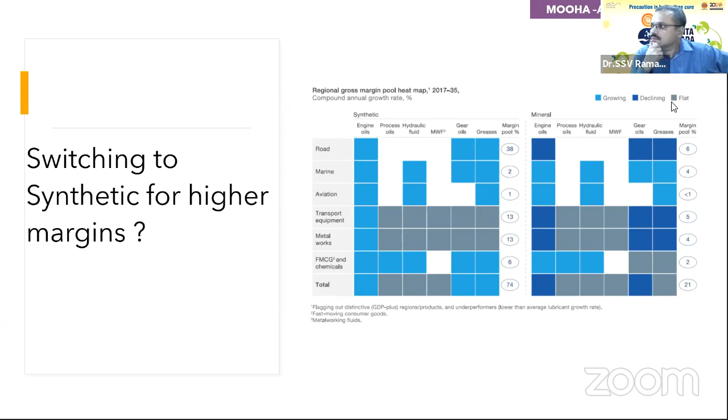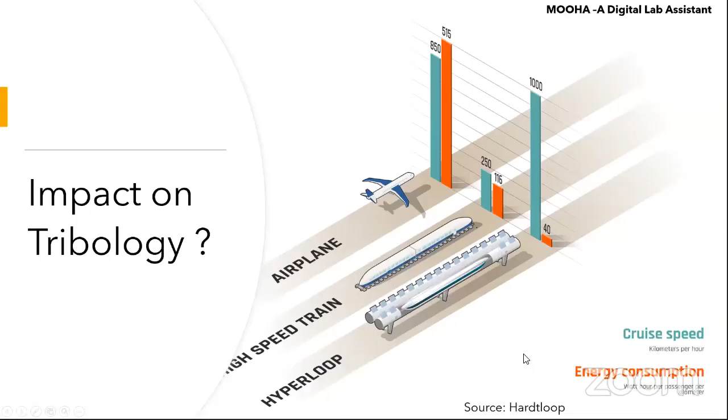Well, the last question we have before Sergio had to take leave, and then we have a few questions for Ramakumar. The last part is Industry 4.0, digital transformation and tribology. Ducom, we are playing our role. We are automating a laboratory information system in line with our discussion with Sergio about how MOOHA could be used. Sergio, what is your take on it? Especially, you touched upon different elements of digitalization. Where do you see this digital transformation helping your industry, and what should be the role of tribologists in this?

Well, we have been applying Industry 4.0 for some years now, but we see the great advantages mainly from the manufacturing point of view. There are implications on production, and there's still things like additive manufacturing. I'm a believer in this technology, and I think we have to find room for it in the bearing industry as well. The rest is mostly applicable on manufacturing processes and control, and digital twins is what we are working more on, by simulating processes.